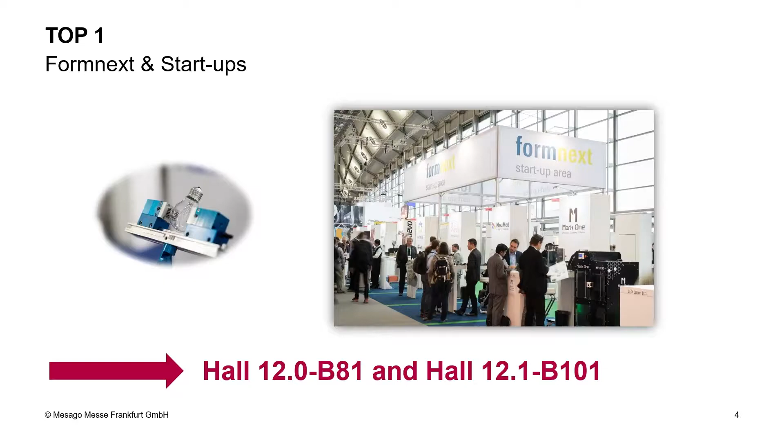Another important pillar in the promotion and exclusive access to the startup area in this Pitchnext event is the Startup Challenge. Here, companies can apply with their idea and innovations, and the winners receive a free stand in the startup area, as well as an article on 3dprinting.com.

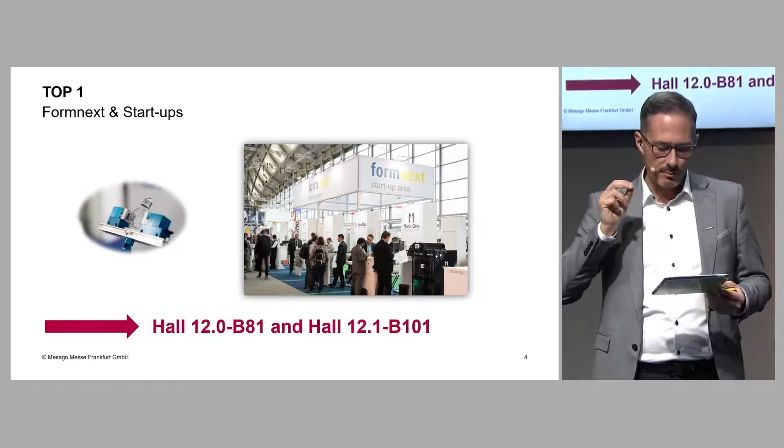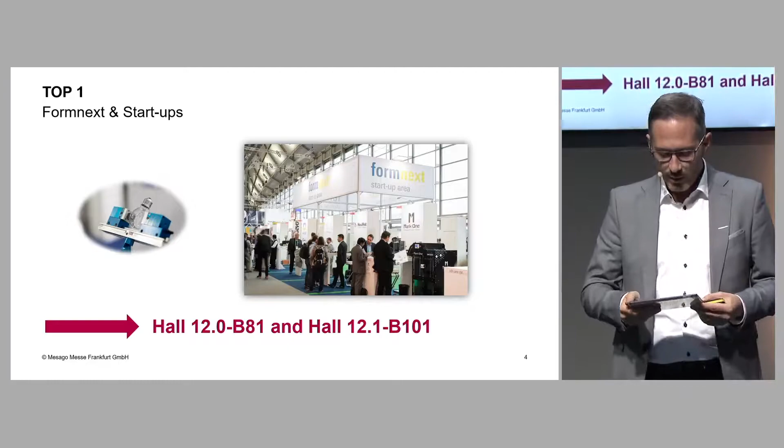For the past 2 years, there has been another important prize to win, which is also awarded here as part of the Pitchnext event, namely the AM Ventures Impact Award, which was created for startups that particularly have a large impact on the topic of sustainability.

For an event as important as the Pitchnext event, it naturally needs partners who make such an event possible in the first place.

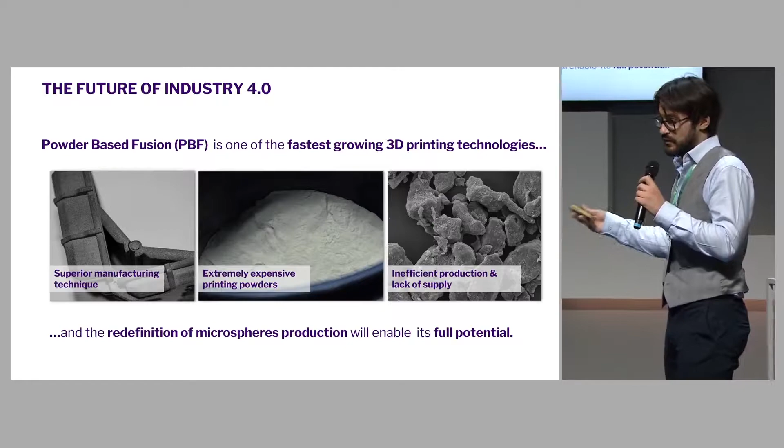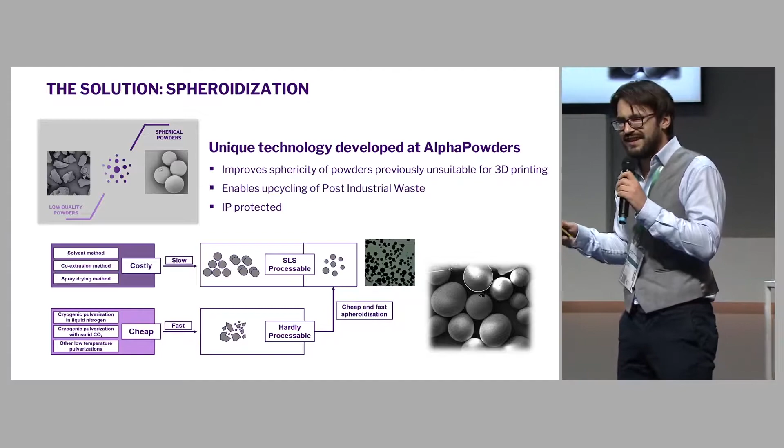In order to achieve that, we came up with a novel spheroidization technique, more unique, more useful, more versatile, more stable than any other known technique for polymer powder spheroidization till now. The technique allows you to improve quality, that is sphericity, of not only cryogenically ground polymers, but also flakish dust waste materials generated by various industries.

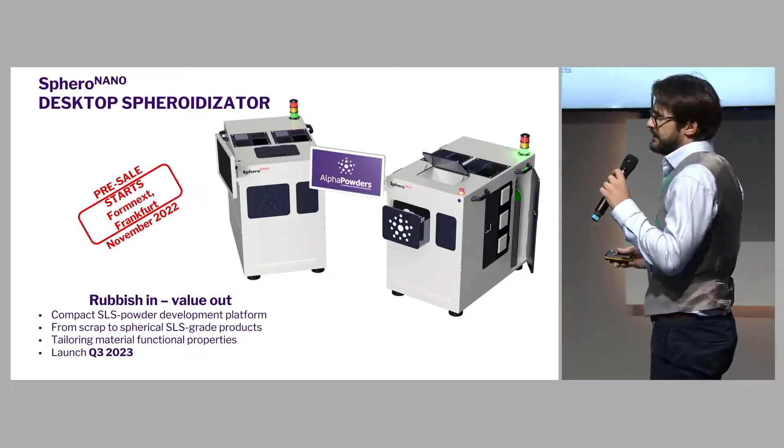We want to make a change now, so we decided to offer the solution to the AM sector in order to allow all companies dealing with polymer powders to improve their products. The first product that we are offering is SpheroNano. This is a desktop, small spheroidizator meant for improvement of quality of powders developed by various R&D centers in different companies. We are starting pre-sale tomorrow, so feel free to contact us.

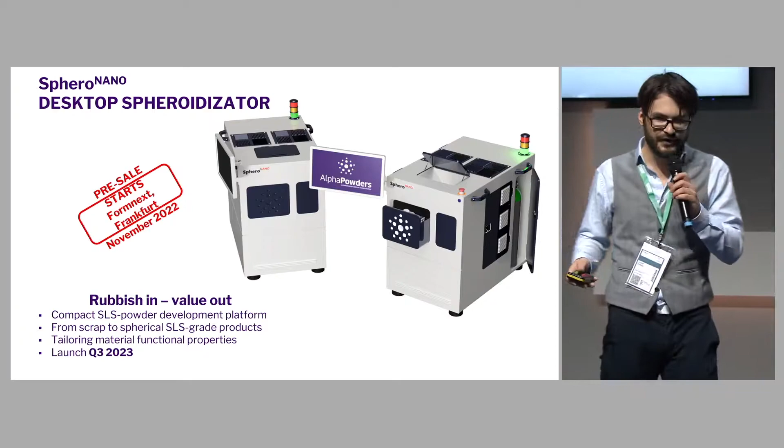If you want results already, we are open for in-house trial spheroidization. Because the solution is quite versatile, we offer it both to polymer manufacturers and 3D printer manufacturers. Also, we offer it to recycling companies.

In order to secure lead times for SpheroNano devices and facilitate the distribution process, we are starting close collaboration with the Amazemet company.

SpheroNano will be devised with add-ins that may be quite interesting for you. It will have a special package for processing of high-performance materials melting above 180 Celsius degrees. It will also have open system software that will allow you to perform research and finely tune spheroidization and rounding properties.

My name is Dominik Zdybal, and I am CEO of Alpha Powders, responsible for strategy and innovation. My past experience includes co-founding of Progressive Space. Together with me, Alexander, CTO, expert in polymer processing and polymer technology, and Karol, business advisor and our insight into the VC world. Together with this interdisciplinary team of founders, we gathered an even more interdisciplinary team of employees that allows us to achieve our goals. Thank you for your attention.

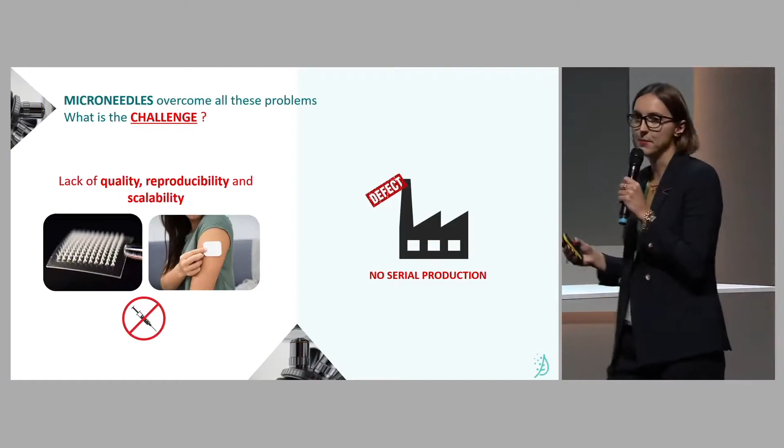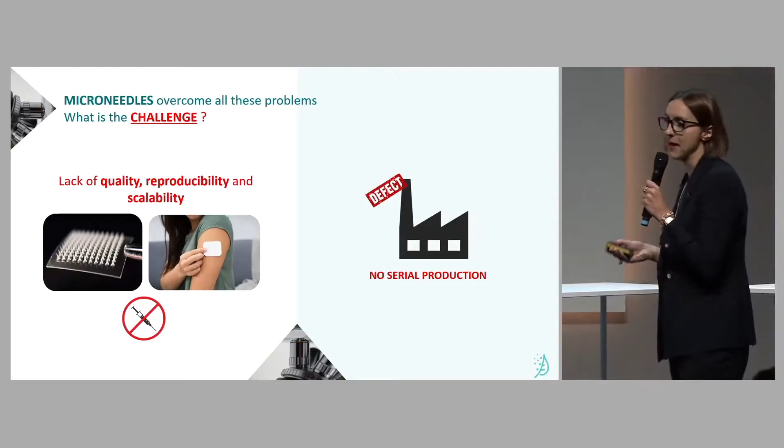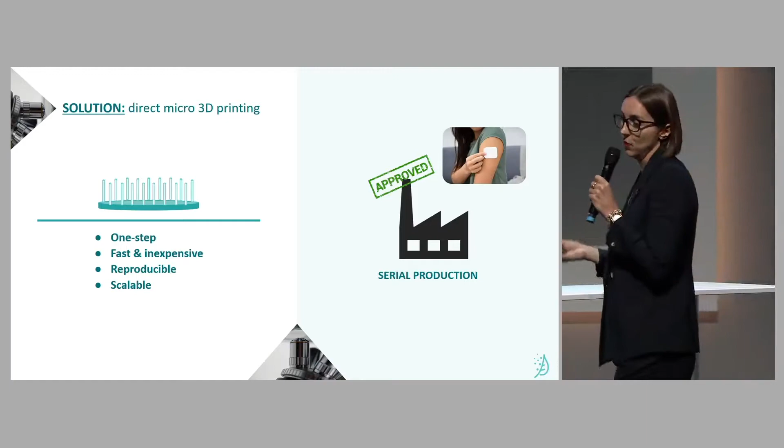The main problem of this technology is that there is no production method able to meet large-scale manufacturing demands. Also, the current methods lack quality and reproducibility. The simple solution to this seems to be direct 3D printing, which is quite simple - it's one step, direct, and also seems to be fast and inexpensive. Moreover, it offers reproducibility and scalability towards the massive large-scale production we need for replacing the syringe.

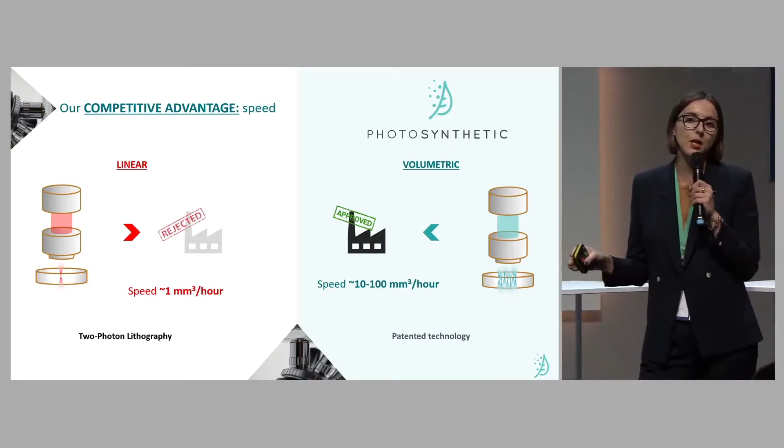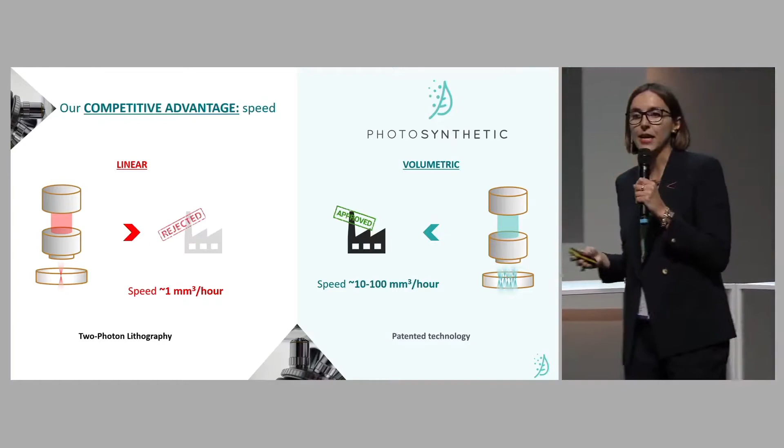At Photosynthetic, we have been working on a novel approach called volumetric printing. Instead of using a single light beam, we use 1 million light beams. This gives us the advantage of speed, so we can rapidly increase the speed of micro 3D printing, giving us the possibility to scale towards large manufacturing. The technology is well patented - currently we have 3 patents, and we have been working on this since 2019.

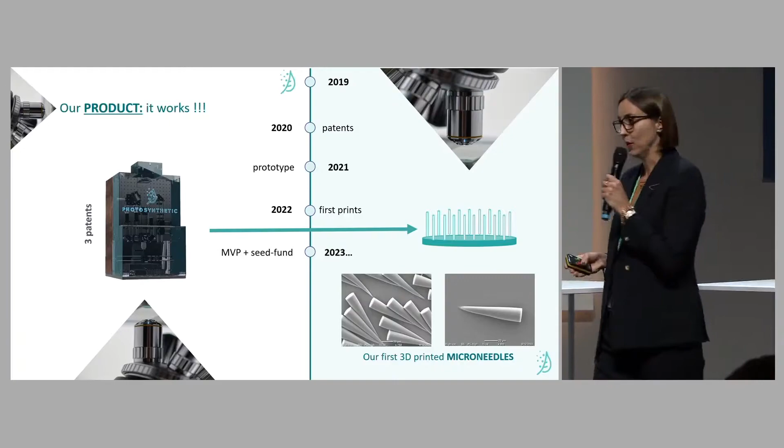For the moment, we are finalizing our MVP, and very recently we printed the first structures. You can see prints of the first microneedles - this is a first trial, and we are very happy to show you this. We are very proud of these pictures.

We currently have some launching customers and partners - currently 3 customers who are paying, 3 customer leads, and we identified more than 50 prospects within the microneedles market.

In terms of the business model, our biggest ambition is to actually become a new manufacturing standard, including microneedles, with a revenue over 50 million euros. Within the next 5 years, we would like to capture 10% of the market. So to finish, I would like to ask you to join us printing the future at photosynthetic.nl and explore other possible applications of the technology.

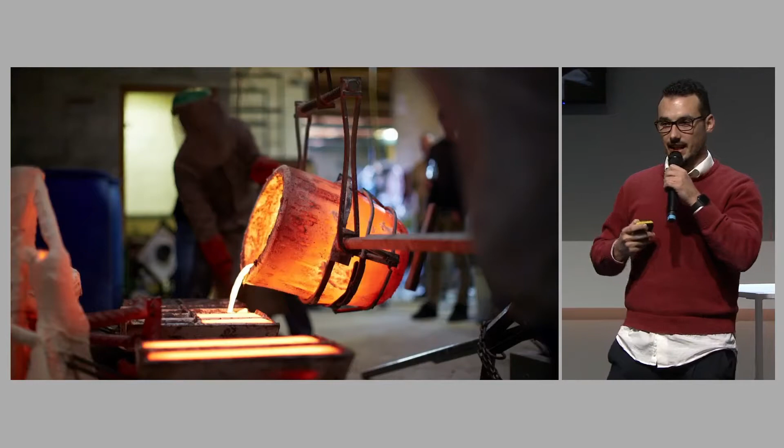Thank you for the presentation. Materials have shaped history. One example is clay. Clay was shaped with a turning machine to create tools and drinks. Then, to improve the material and achieve high performance, two or more materials were combined to create the best performing material, such as composites or metal alloys.

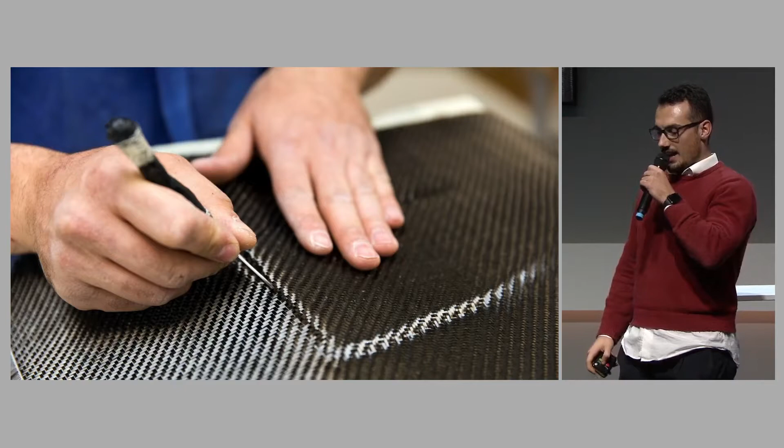Hi everyone, my name is Valerio di Pompeo. I'm CEO and co-founder of SphereCube, and we want to reshape the future by 3D printing technology for high-performance composite materials.

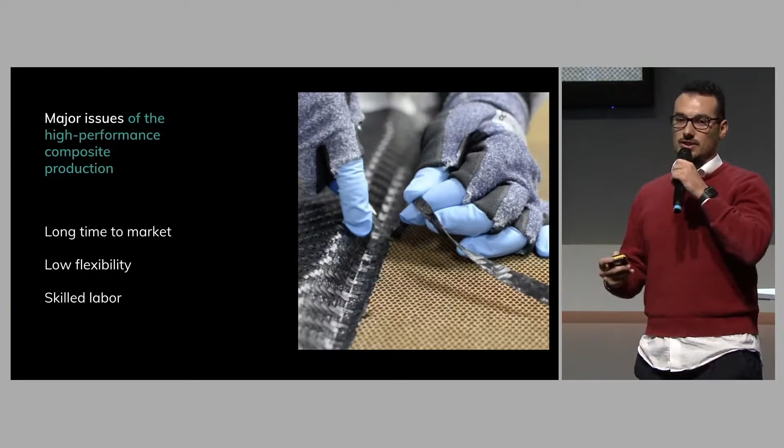Actually, the problem in the composite sector is that creating a part requires many steps in the process, up to 15 steps. It requires molds, and the process is mainly handcrafted. This increases the time to market and the cost, and reduces flexibility. To resolve that, we want to use 3D printing to improve high-performance composite materials, with automation, less mold usage, and adding material in order to increase the complexity of the part's geometry.

Thank you very much for your attention. See us at our booth on level 12, B81, and we want to meet in order to discuss the proof of concept. Thank you for your attention.

Great, Valerio, thank you so much for the presentation. So how far are you with your product? That would be my first question - how advanced is it already, when can you start? The mechanical performance, specific mechanical performance - not using the mold that is necessary in high-performance composite material, and reducing the steps of the process in order to reduce the time to market and the cost.

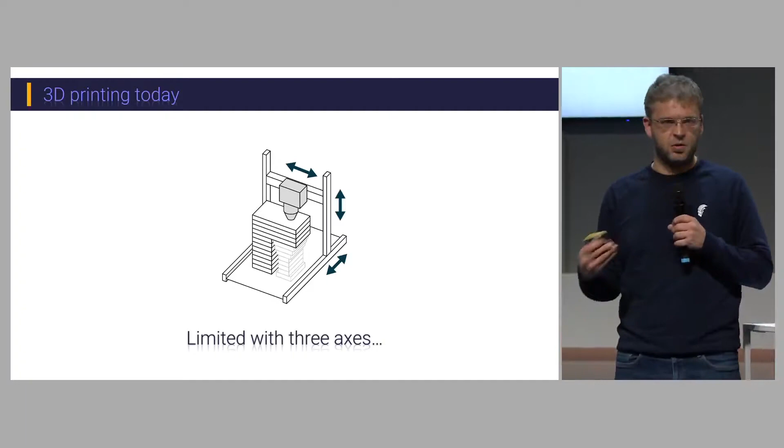Even on complex surfaces. As you all know, there's a common modeling pattern, one modeling paradigm, with horizontal, even and flat layers building up from one direction. This is due to the limitation of systems restricted to 3 linear axes usually, and software that is only adapted to this kinematic.

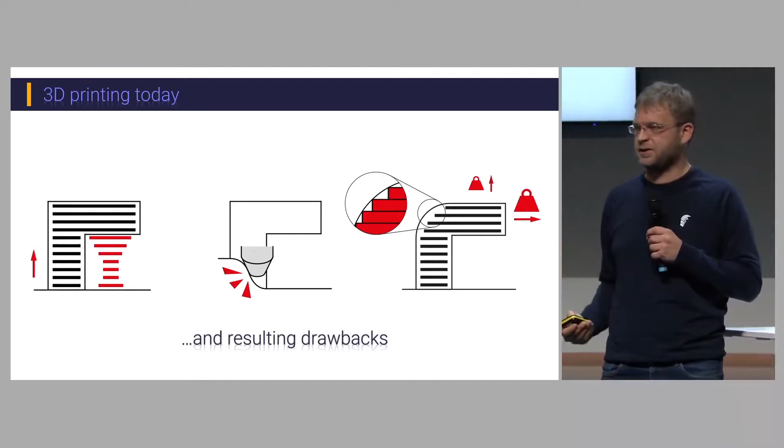The drawbacks that come with it: in the modeling direction, you need support structures, as you know. You have the problem that you can only print on horizontal and flat surfaces usually, and most part characteristics like tensile strength and surface quality are defined by this modeling paradigm.

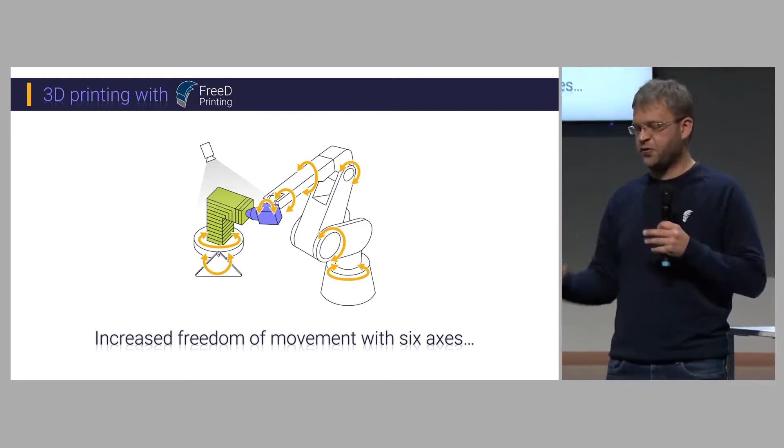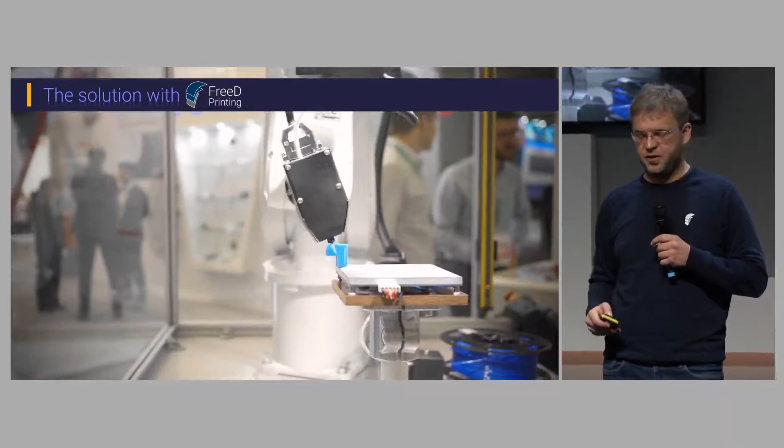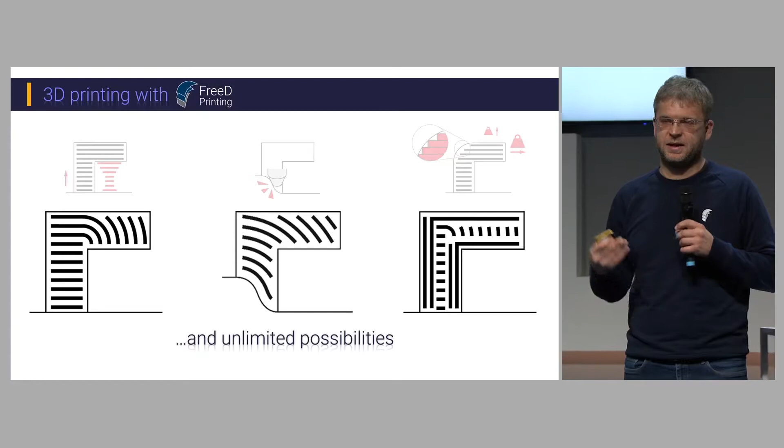By doing that, we have the potential to reduce or avoid support structures, and the possibility to print on curved surfaces, not just horizontal and even layer faces. We can also combine different layer orientations in one part, optimizing and affecting part characteristics like tensile strength or surface quality.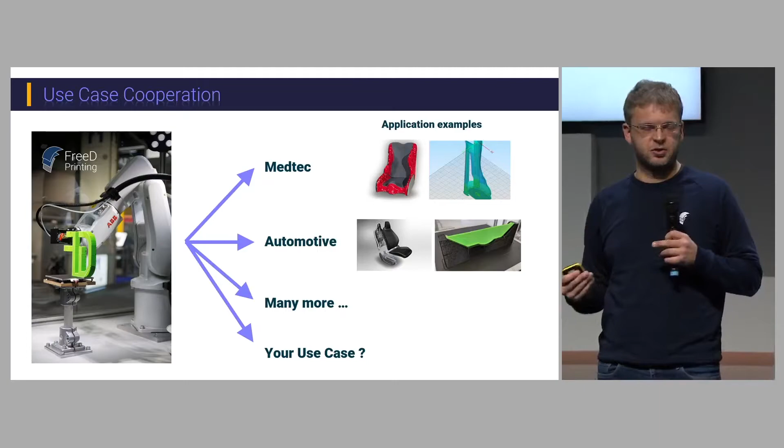Right now we are already in contact with several partners, for example in MedTech. Application cases are prosthesis and orthesis, also from the automotive industry with prototypes and pre-series, and many more. Maybe your business case, your use case can benefit from that too. We are always searching for new application cases to identify which use cases can benefit from our technology.

So yeah, we would be happy to discuss that with you. Meet us at our booth in Hall 12.1.

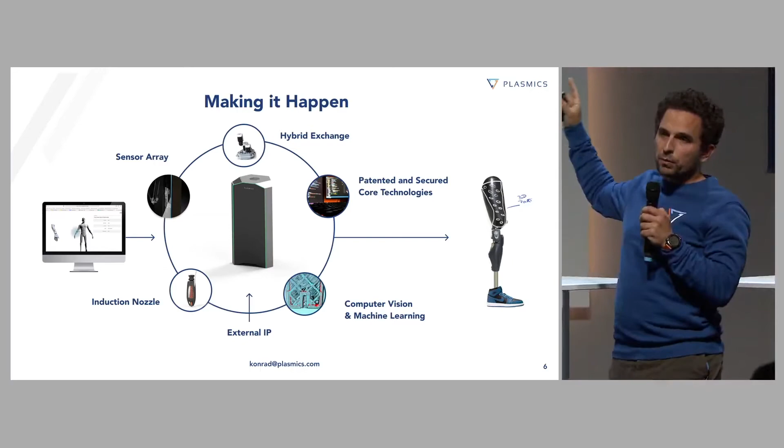But how do we do that? Well, we combine our unique technologies, being induction-based nozzle and our machine learning, with our software together to produce the best quality part possible with FDM 3D printing.

This is a demonstration of how our quality control process works. Basically, we analyze layer by layer, and then we compare it against what the optimal solution would look like. Yeah, it's going to finish. And then we can create a report to show, okay, we are actually up to spec or we are not.

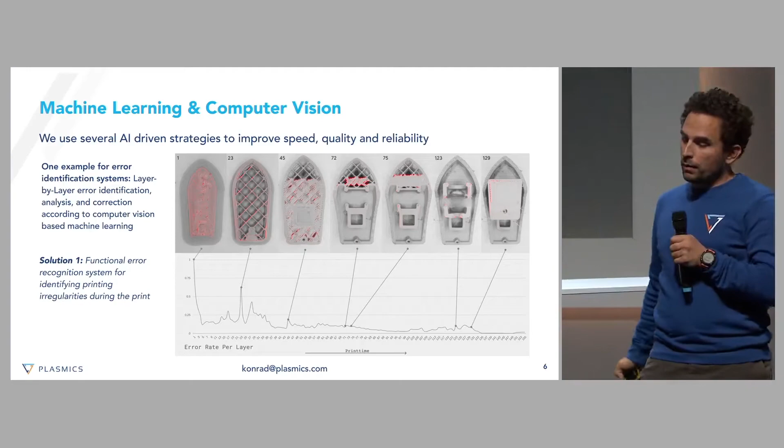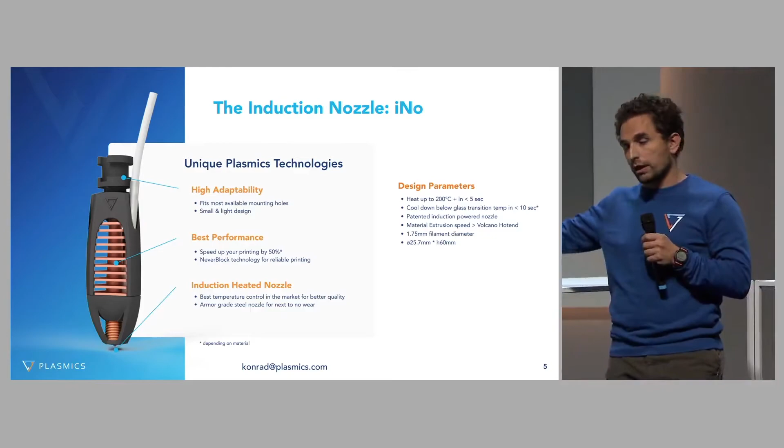We recently launched our nozzle, which is induction-based, the first one in the market. It's really groundbreaking, and our patents are also tied into this 3D printing nozzle. And this is not just an easy feat. It's actually a pretty hard problem, NP hard problem, to be honest. But we have the great team for that.

We have material scientists. My co-founder, Stefan Spohr, would be in this category. But we have a team of another 15 people strong to facilitate this, as well as advisors.

However, if you think about certified production on site, wherever this may be, then you can produce not only prosthetics, but other products, like, say, insoles or other orthopedic devices. And you're not bound to produce in-house, on-site, and sell elsewhere, but you can basically sell the machine and then locally design and produce your IP and sell it globally.

Yeah, this is what we do at Plasmics, and I'm really happy to have your questions.

I'm always triggered by metal 3D printing because I see a lot of potential in it, but also a lot of hurdles yet. That's basically what we try to solve with ValCUN, because we want to bring metal 3D printing towards serial production in an economical way. To do that, we first have to look at a couple of hurdles that we identified.

We focus initially on aluminum, because aluminum today is somehow understated. There are so many applications for aluminum, and to be honest, printing aluminum is kind of a pain in the ass for a lot of technologies.

Second thing is hardware. So far it's still expensive because of the use of lasers, so we want to bring that down. Also, that relates to productivity, because if you have a fast machine, it can be more expensive. The problem is most technologies today are quite slow with an expensive machine, which isn't really beneficial for serial production.

Another thing is the feedstock, because a lot of technologies use high cost feedstock, which is not necessarily necessary to come to serial production. And the technologies that use powders - a lot of people say additive manufacturing is good to reduce CO2 footprint, but if you look at what it costs in terms of energy and CO2 footprint to make powders, you would be amazed how sad it would be for additive manufacturing.

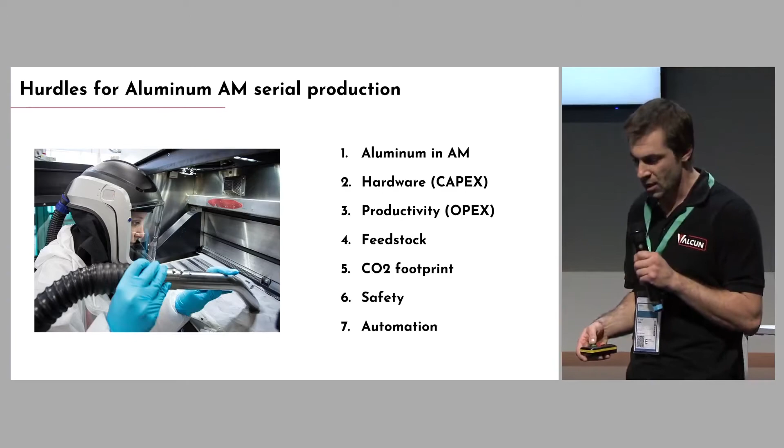So how are we dealing with that? Here you see a movie of our process - basically it's FDM 3D printing, but instead of using polymers or powders in a polymer binding, we use direct molten metal that we deposit in a controlled way. In that way, we can actually print aluminum quite efficiently, because the fusion energy is coming from the printhead itself.

As you know, aluminum is highly conductive, so it's like filling up a bath with the tub plug open. Here we actually use all the energy inside the printhead to deposit the material, so the only extra energy we need is for the fusion. It's quite simple technology, similar to FDM - the only thing you have to do is melt the metal inside the printhead, which can be quite straightforward.

The productivity is basically the same as in FDM. We have demonstrations with a print nozzle of 7 millimeters, and we've gone much smaller so we can have the same resolution as classic FDM printing. For the feedstock, since we print everything through a nozzle, it doesn't really matter what we feed into the printer. At the moment we use wires, but that can be anything else.

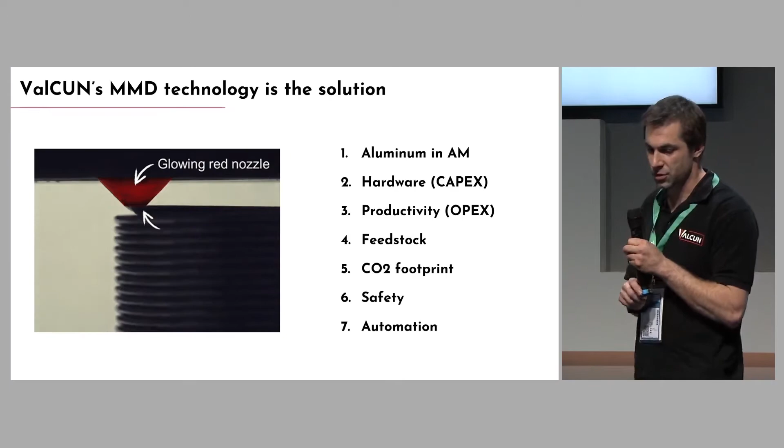In terms of CO2 footprint, if you take aluminum chunks, you don't have to do the whole process to go towards powders and the extra energy that's needed for that. In terms of safety, we don't have splattering of plasma or powder flowing around, so it can basically operate in open air.

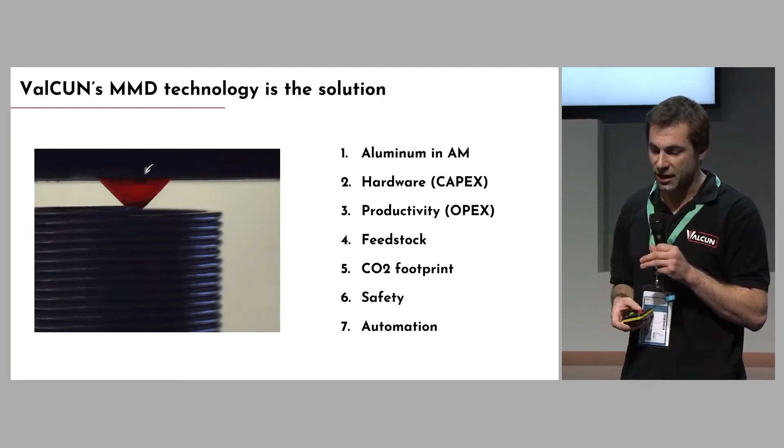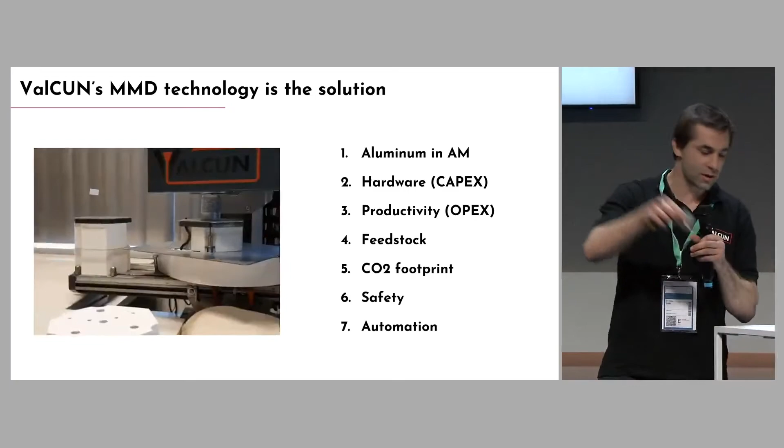I'll come to the next video I have here that demonstrates the automation capabilities, as we print basically in ambient atmosphere. We can simply hot-swap after printing, since the process isn't affected by thermal stresses, we can use very light build plates to print our parts on. So the part being printed is the one I have here.

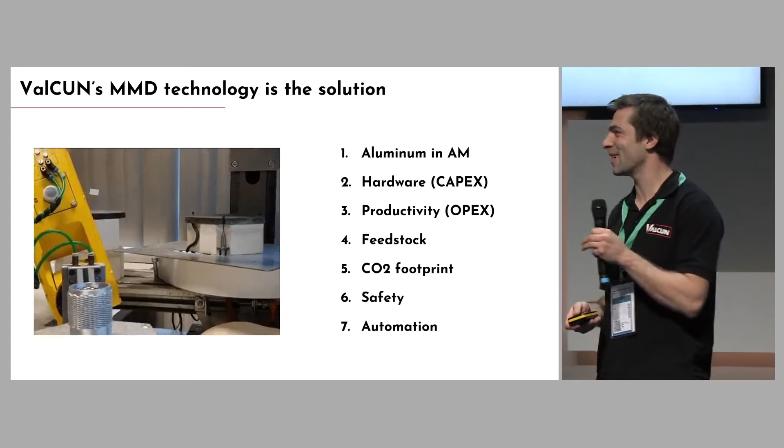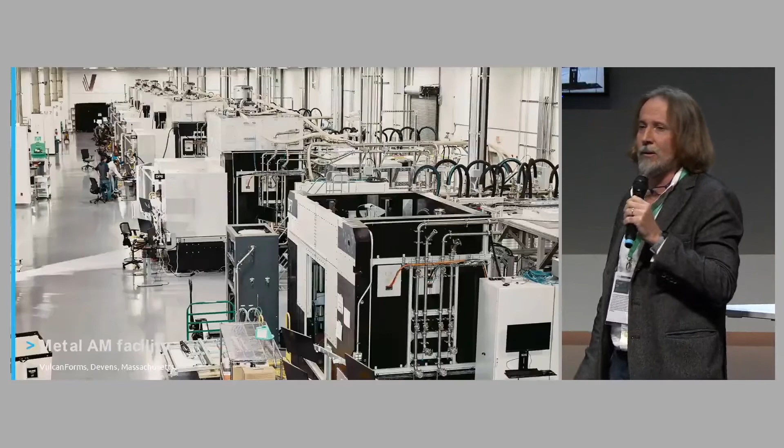My name is Matteo Vettori, I am the CEO of Mach3D. This is an FFF additive manufacturing production. This is an SLS MJF production. This is an SLA production, and this is a metal additive manufacturing production. Then we jump in space, to the International Space Station, where they have an additive manufacturing lab.

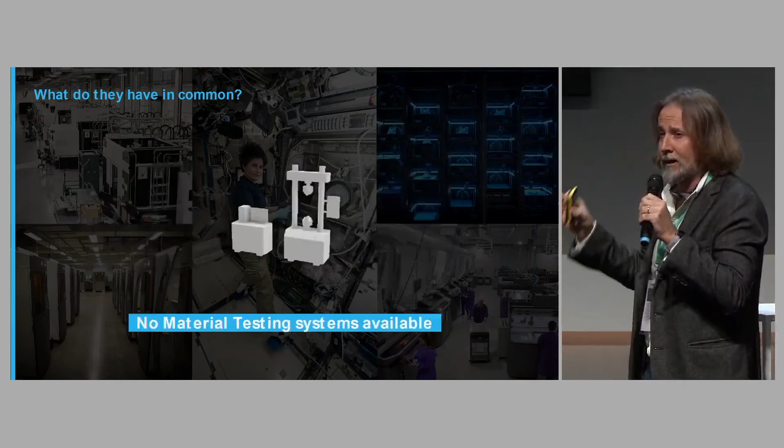What do they have in common? They are transforming raw materials into final products with a single-step process. Moreover, there are no facilities to perform material testing directly there. Material testing is key to detect anomalies in materials that have to move to industrial production.

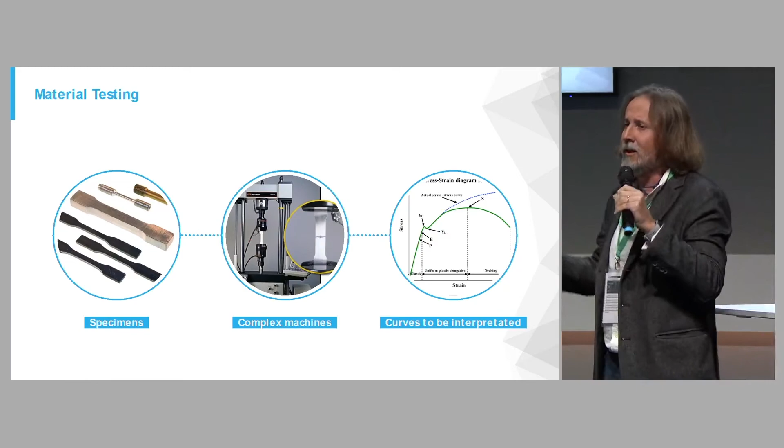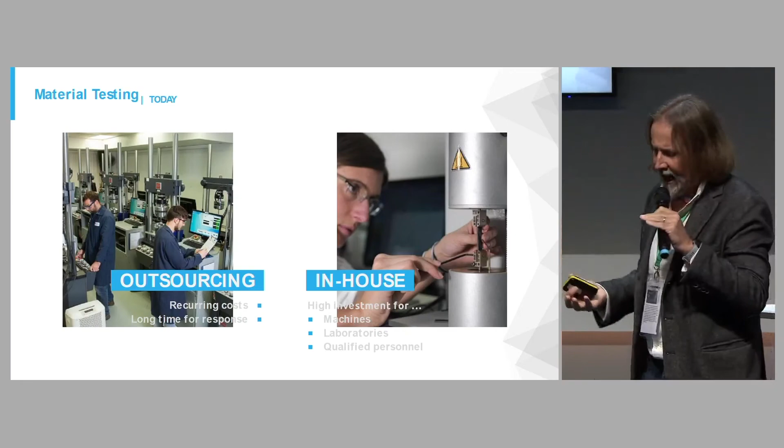Today, material testing starts from specimens that are tested on complex and dangerous machines that generate curves from which engineers are able to extract the mechanical properties. You can do this in outsourcing with long time to response and recurring costs, or in-house with a huge investment for mechanical testing solutions, laboratories, and qualified personnel.

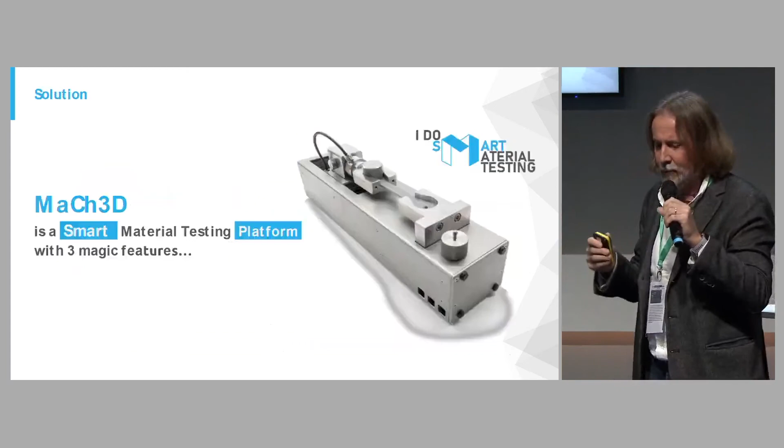Today, traditional material testing solutions, for cost, complexity, and timing, are not ready for industrial production and not accessible for small, medium enterprises. Mach3D is a smart material testing platform with 3 magic features.

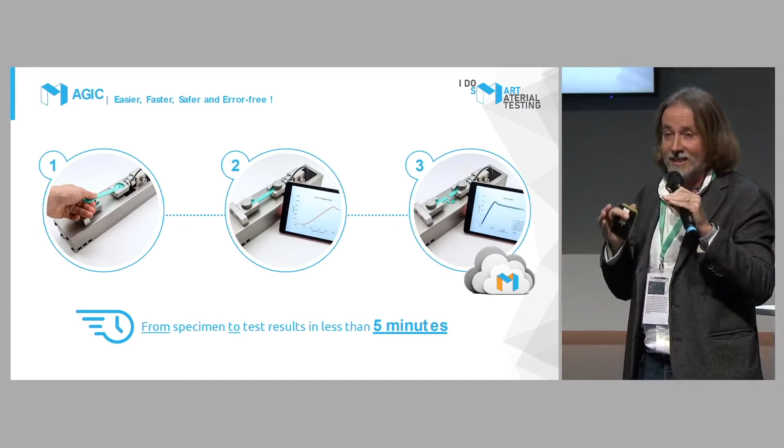Its size, extremely compact, allows Mach3D to be placed everywhere in every company. Thanks to our patented fixture, the test is made easier, safer, faster, but still accurate. Thanks to the cloud, results are immediately shared in the company, can be correlated with process parameters, and then we can enable optimization and industrial process monitoring and correction.

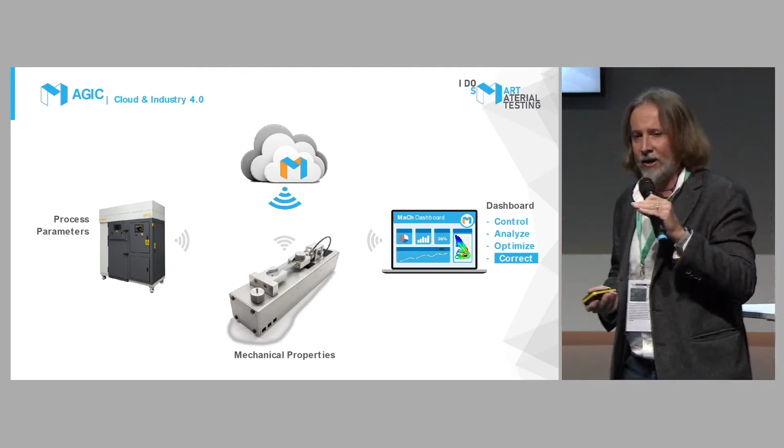We are a team of engineers, 2 founders, mechanical engineers with a PhD in material testing and non-conventional materials. Then the team is completed with marketing skills and software skills.

We have a mixed business model. We sell our hardware in one-off sales. We generate recurring revenues from the cloud platform and the artificial intelligence features. Mach3D will be a network of sensors collecting data that feed our data pool, on which artificial intelligence could generate more and more value for our customers and then for us.

We are in the material testing market, which suffers from huge entering barriers, as we stated. In Europe, in additive manufacturing and plastics, we count more than 100,000 companies. 60% of them are ready to invest in material testing with a budget comparable to the Mach3D budget. This makes, for us in Europe, a 1.5 billion market ready to be achieved.

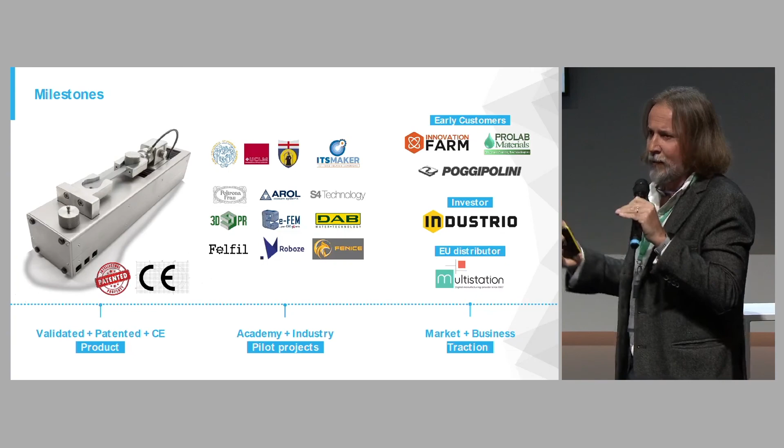We differentiate through ease of use and the maximum load-to-cost ratio, and for our cloud. We now have a validated, patented, and certified hardware, our first industrial and academic applications, first customers, and first market traction.

We want to enter the market in Europe over the next 3 years, while completing our product. We need a 1.5 million euro ticket for doing this. This is Mach3D, the revolution in material testing.

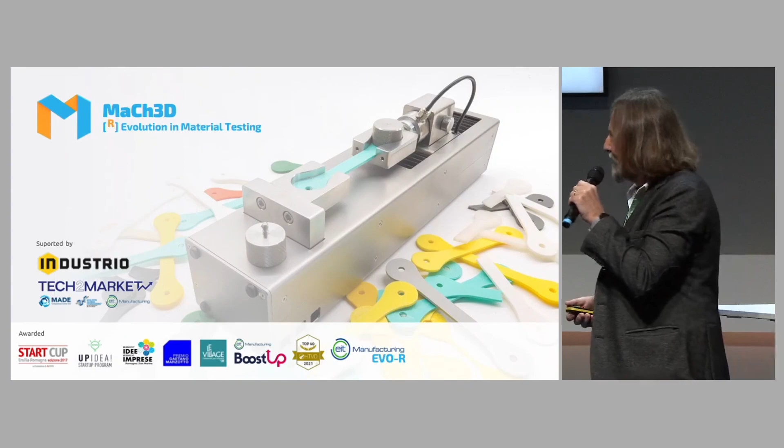Awesome, thank you so much. Thank you, just in time. I really like the last part because that will be my next question, what you really need, since it seems already very advanced and clear. Yeah, we just need the money to do our project.

Very good, very good. Any questions from the audience so far before I ask my question? No? Do you have already customers in place using it with their machines, beside the ones that you have as first customers?

Yeah, so can you give us an example of how they use it? We actually have made two rounds of beta testing. The first round, they were supposed to give the machines back to us. In the second round, we've just been able to sell the machines at the end of this testing period. One customer is manufacturing resins for additive manufacturing. The second customer is building small metal parts and is using Mach3D at the end of the manufacturing process. The third customer is an academy using it for research and teaching.

Very good, awesome, thank you. Thank you so much, Matteo, it was a pleasure to have you here. Mach3D, big applause.